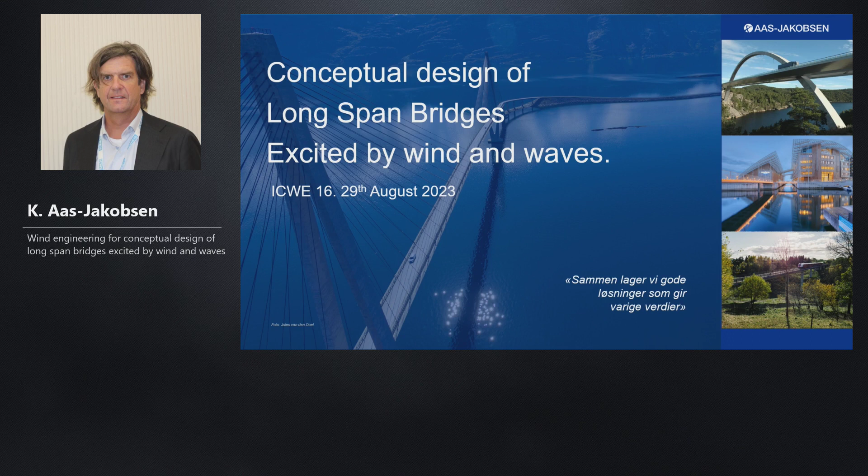Many years ago, I was on a vacation with my family. We arrived at the site very late at night and went to bed. Early in the morning, while still dark outside, the room started to shake. And it escalated fast.

Earthquake. Coming from Norway, we are not used to that, and that was the first time for me. We grabbed our kids and decided to stand at a stiff point in the structure, thinking that would create an air pocket in case of collapse. So we stood there shaking, listening to what sounded like a freight train running through the floor below us, accompanied by concrete elements rattling on its support.

Counting seconds, which is a proxy for energy release. The whole hotel evacuated quietly into the dark onto a small hill next to the ocean. This was a few years after the Indian Ocean earthquake with a devastating tsunami, and you could see that everybody was looking at the ocean and thinking the same thing.

After a long time, we were allowed to go back into our building. At that point, I was very grateful that this country has a comprehensive design code with respect to earthquakes, because an earthquake of this magnitude, as seen in other places in the world, will completely level the buildings to the ground. Back in the room, I was a bit curious.

So the point of this talk is safety of structure, and that you and I have a responsibility of making safe design, even if it's not codified. That is the core of my talk today.

I'm going to talk about ordinary long-span bridges, what happens when we make them longer and put them into the water. I'm going to show that we need extensive measurements of metocean data, how we can transform that into load on the structure, and how we can extract the important design parameters from a huge amount of data.

And in the end, I'm going to talk about some promising technology for wind engineering.

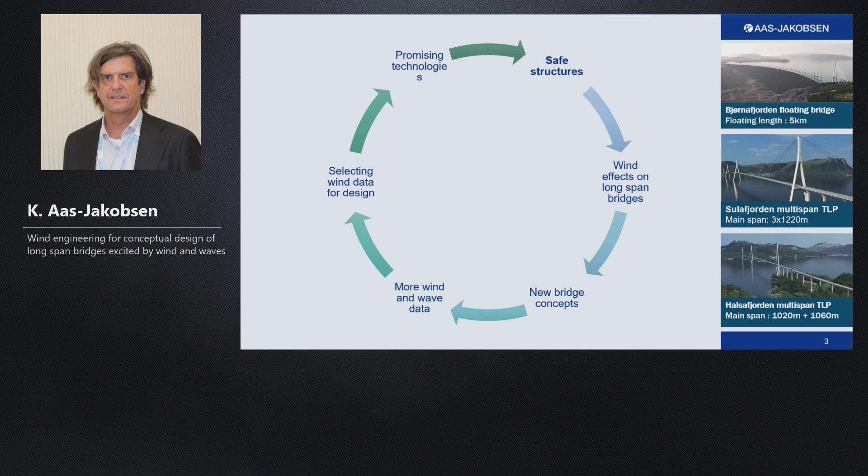Let's look first at some of the basic design concepts. This is a very simplified picture, but what we usually do is get a load requirement from our client, for instance specifying a return period of 100 years. We take these loads and calculate the forces in our structure, and of course we want the forces to be smaller than our design capacity.

To take into account uncertainties in material and workmanship, we reduce the capacity with a material factor. And to take into account uncertainty in our load, we increase our load with a load factor. The total safety for this type of structure is typically around 2, which I think is a comfortable level.

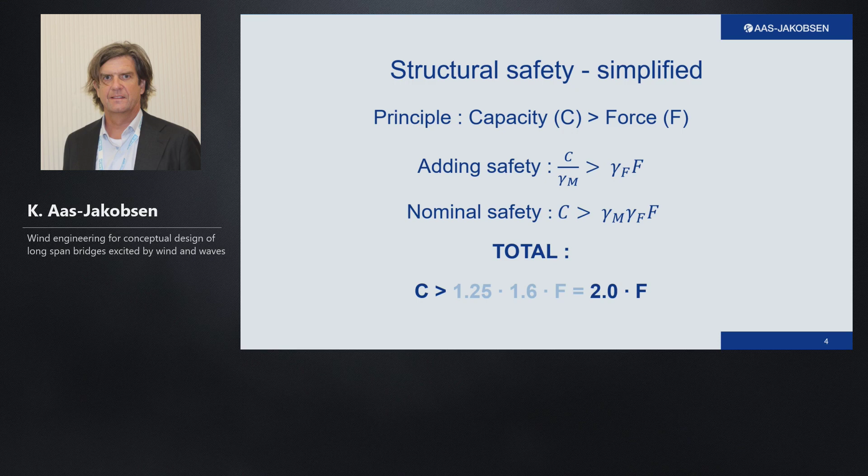So when we start out the design, we get the design requirement from our client, and these are typically functional requirements. It will tell us the number of lanes, the size of the navigational channel, and it also tells us a little bit about the loads.

It will also tell us a flutter criteria, which is a criteria that makes sure that the bridge has sufficient safety with respect to high winds.

Now, for long-span bridges which span more than 1,700 meters, we normally need to do double decks. This, of course, has a big cost impact on the structure. It will change the size of the main cable, make the tower wider, and we need a bit bigger anchorages.

They also specify comfort criteria, typically in the form of acceleration. And then vortex shedding becomes important, and we might need to change the cross-section a little bit to make it work well with respect to vortex shedding.

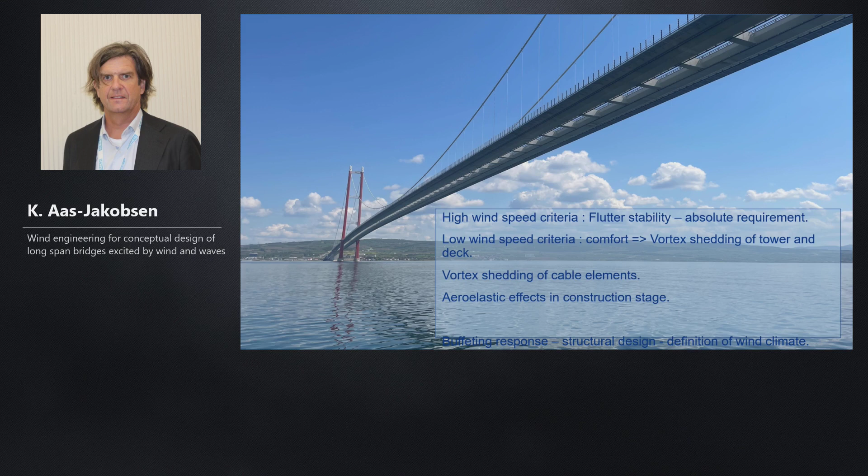Also, we have vibration of individual components, and this needs to be mitigated or it can become a maintenance issue. So in the following part of this talk, I would limit myself to wind loads of the buffeting type, as that is the load that got into our design in the ULS forces.

Now, if we extend the span of long span bridges, the price of the structure increases exponentially. So it becomes interesting to put the towers into water. When we put them into water, they are affected both by static and dynamic loads of the water. And as we get deeper, the foundation becomes more and more complex and expensive. At some point, it will be of interest to see if we can use water as support.

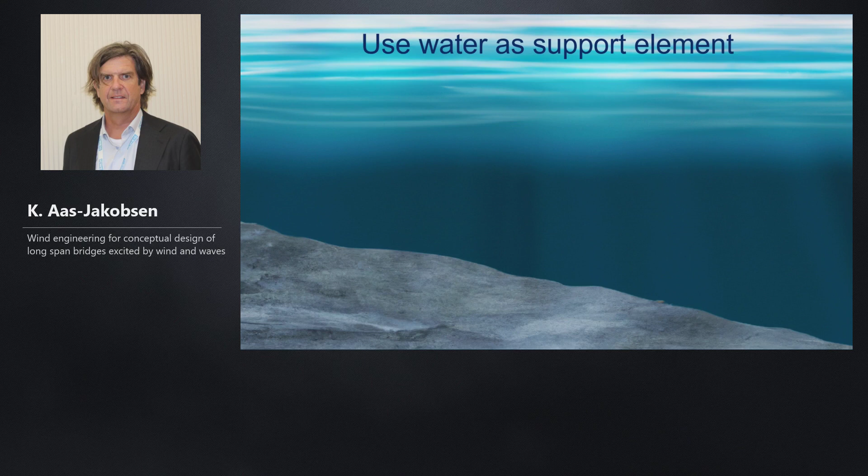But then we also have dynamic structures in water, and we have to take into account the dynamics of the waves. The dynamics of the wave have a different frequency content than wind and earthquake. It also means that we have to take into account hydrodynamic effects of the floater, giving added mass and added damping to our dynamics.

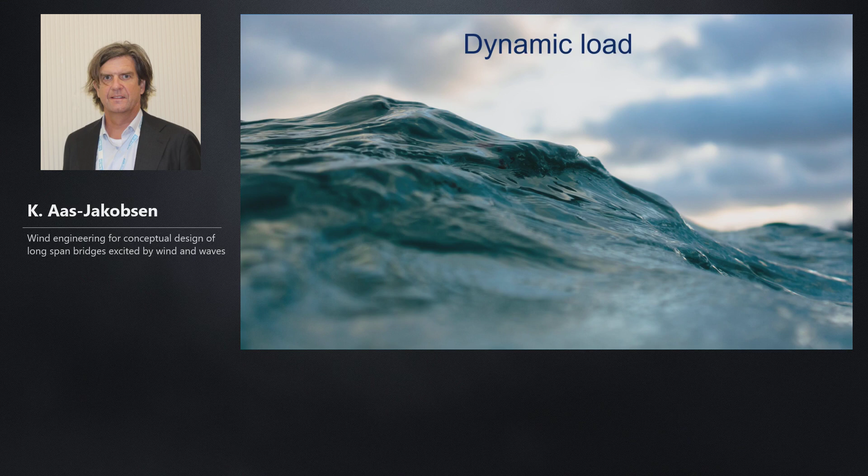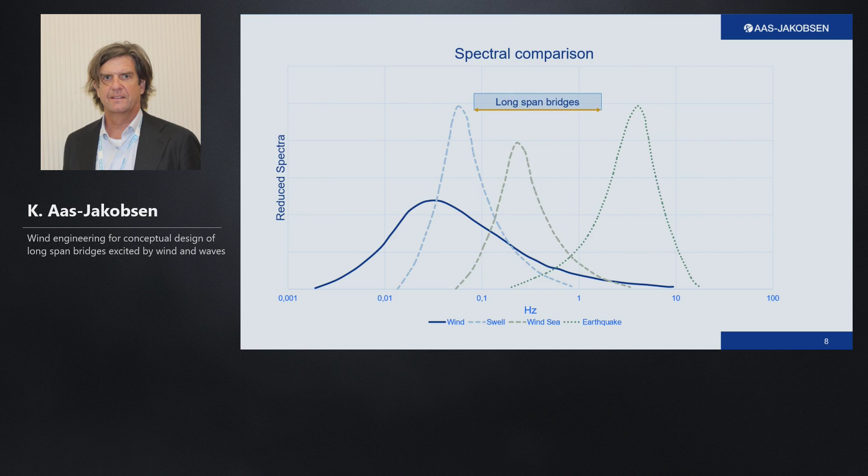Here is a comparison of the frequency content of the different loads. The blue line is the wind, and the green line is the earthquake. You can notice I have split the waves into two groups: one is swell, associated with storms far away from the site, and the other is wind-driven, associated with weather systems passing the site. If you relate this to our typical long-span bridges, we have frequency in this range. And of course, if you have the towers on land, you don't have to take into account wave loading.

For buildings, you will see that they are more sensitive to earthquakes. But if we then move into the water, looking at jackets, GBSs, or caissons, we get frequency that starts to pick up wave dynamics.

If you move further out into the sea, we find TLP structures, tension leg platforms, which are typically gas and production facilities connected to the bottom with steel tubes. These are more flexible, and the typical design of these is to try to separate the lowest frequency away from the swell.

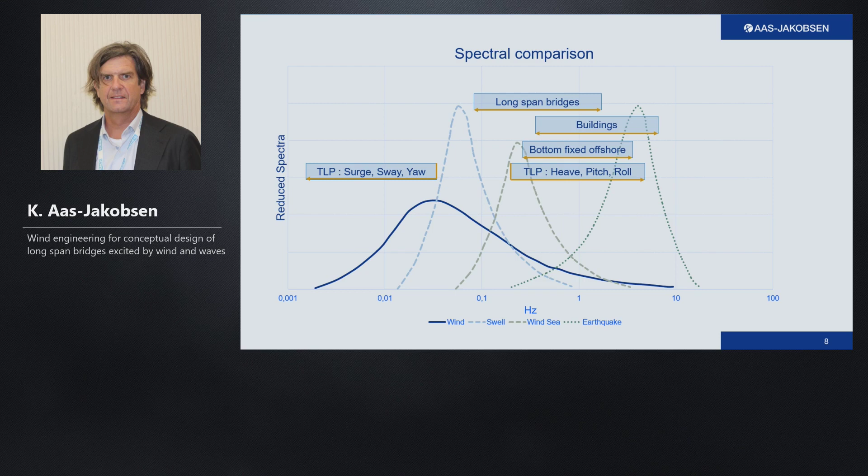Now, if you go back to the long span bridges and start to make them longer, you get more of the low frequency part, lower frequencies. And since we have a superstructure on top of this, for instance a TLP, you have a lot of modes related to the superstructure, and it makes it impossible to design yourself out of the swell. So this needs to be taken into account in our design.

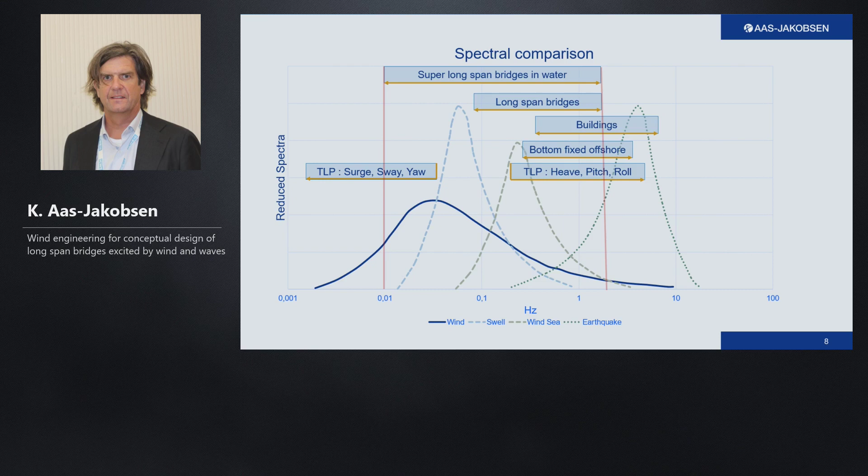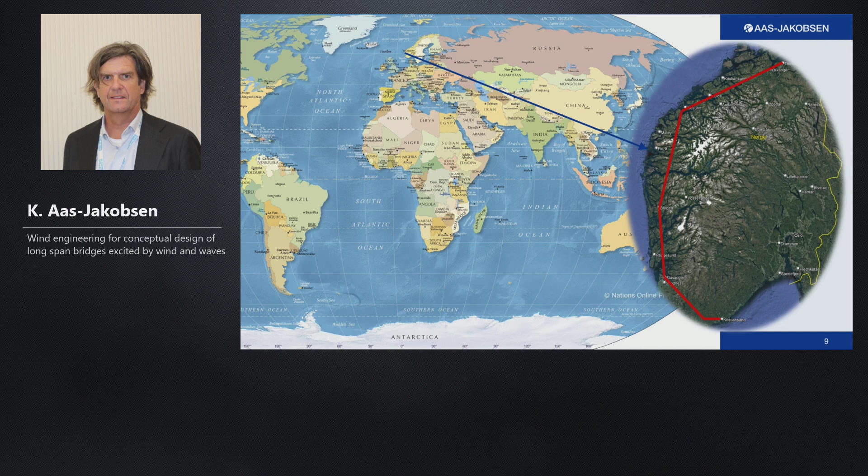I'm going to show two examples. They're all related to the E39, a planned highway along the western coast of Norway with the purpose of reducing travel time. The road crosses many of the widest and deepest fjords in Norway, and these concepts I'm going to show today can be used for several of these crossings.

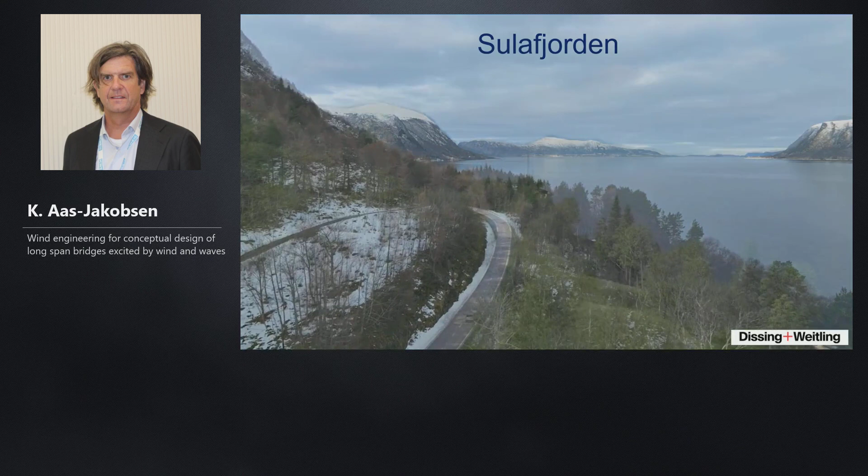So this is the Sulafjorden. It's a typical Norwegian fjord, quite wide, with a complex surrounding terrain and steep faces that continue down through the water. The water basin is quite exposed. Down to the left of this picture, you find the North Atlantic Ocean, and the fjord is only sheltered by some scattered islands.

Our client, in an early phase, identified four different possible alignments, ranging from 2,700 meters at the fjord entrance to 4 kilometers further into the fjord. The depth of this fjord is around 450 meters, and quite flat in the middle.

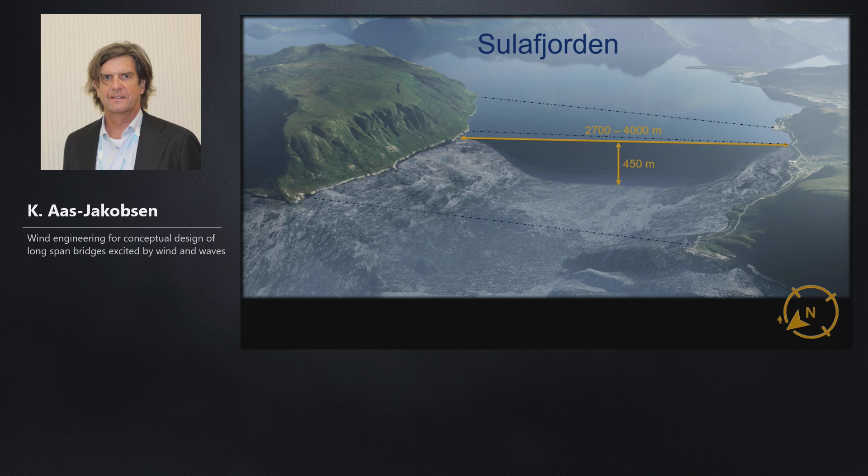So they wanted us to explore four different concepts. At the front is a one-span suspension bridge with a main span of around 2,700 meters, a little bit shorter than the planned Messina bridge. Then you have two concepts with fixed bottom foundations, and then there's a TLP structure, which is what I'm going to talk about today.

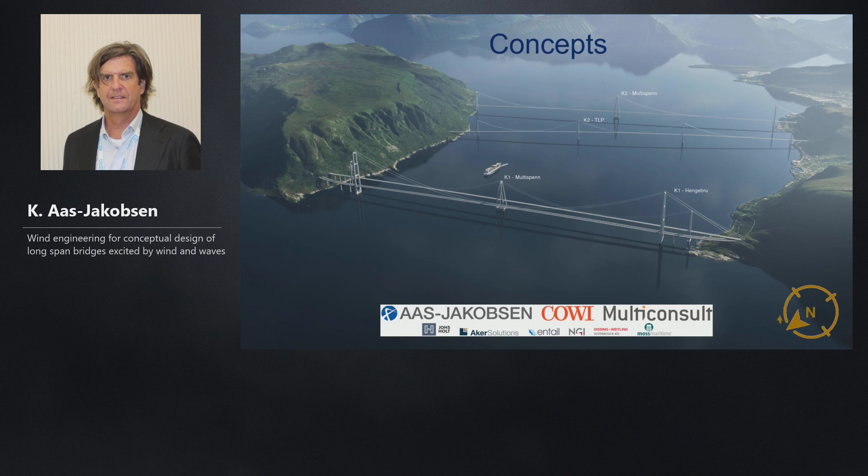This multi-span TLP structure is supported by floating foundations. These foundations are supported by tension leg and suction anchor, and combined suction anchor and mass anchor at the bottom. This video shows a typical installation sequence for that system. Tension is added to the system by deballasting the floater, as shown here.

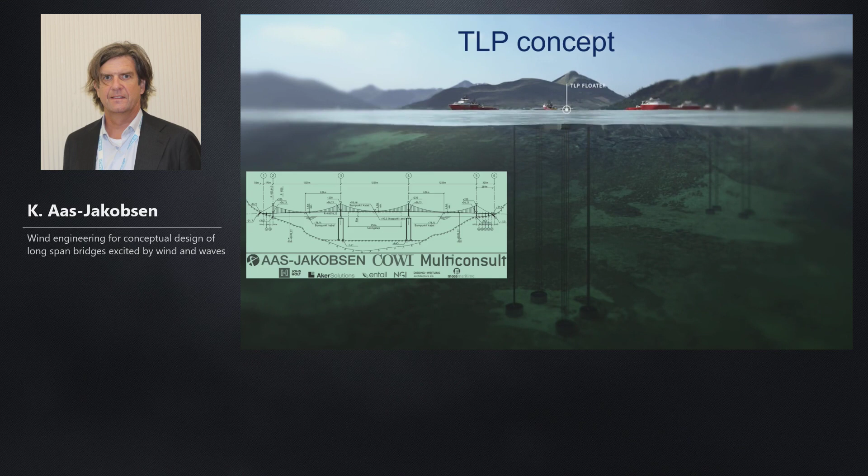Now, having a multi-span bridge, we use steel towers at the floating foundation. The steel towers were chosen because of low weight, so we want to minimize the weight.

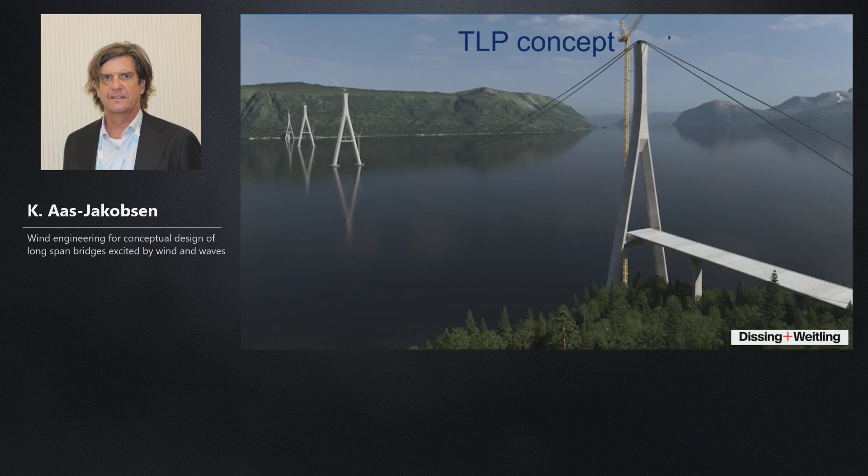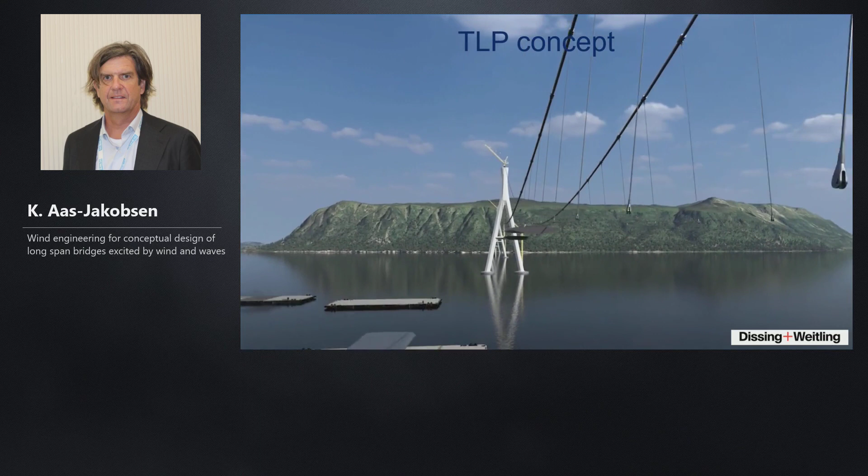But the main problem with a multi-span suspension bridge is that you can have different loads on different parts of the span, and that creates unbalanced forces over the tower. These have to be balanced out, and during that balancing, you have to adjust the tower stiffness.

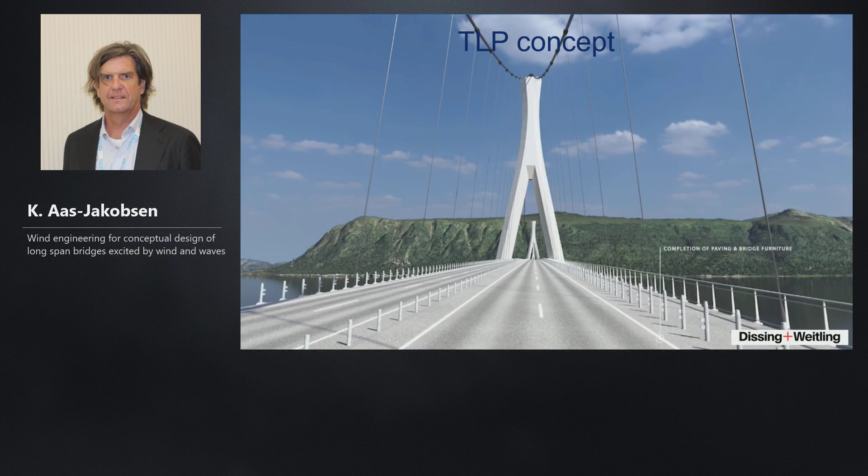I think overall we have found a good balance between structural design and aesthetics. Seen from the sea, when they're coming in, you can see that the towers are around 200 to 230 meters, and it's a quite transparent scene from this angle. It also accommodates the largest cruise ships in the world.

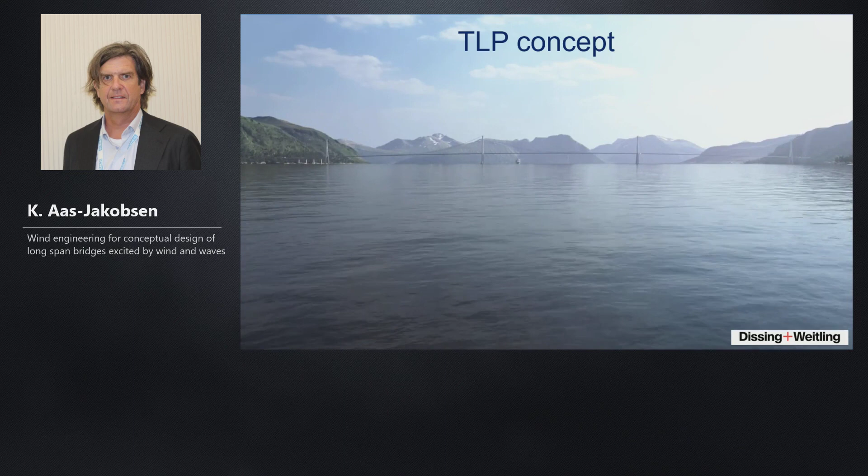So here are the 4 alignments. At the beginning of the project, more than 8 years ago, the client asked us to understand the metocean climate in this fjord. How do you go about doing that? We specified a measurement program consisting of 4 meteorological wind measuring masts placed at strategic locations compared to where we can expect towers. We also added wave buoys, both permanent and temporary. Some of these buoys measure current, salinity, and temperature all the way down to the 450-meter deep bottom. I would say the measurement campaign has been very successful.

We have been logging 24/7 with up to 10 hertz, and we have data for 8 years. Looking at the quality of the data, we find that 99.9% of the 10-minute mean values that are quality controlled and stored in the database are found useful. The same number for the wave measurements is 97%. This shows that you can have ambitions with respect to measuring both wind and waves.

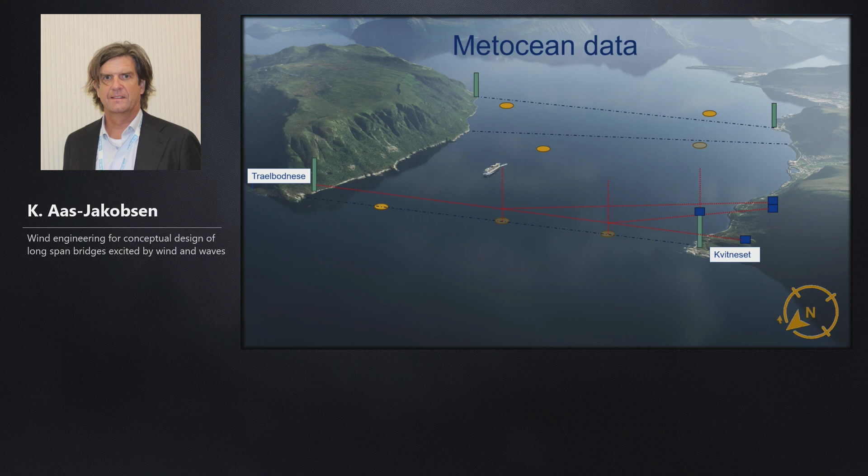We also challenged the contractor to use LiDARs, with a basic outline like this. The purpose of this was twofold. First, we wanted to understand how the mean wind profile was along the tower. So we placed the LiDAR on top of the wind measurement mast, and we were able to measure an additional 200 meters up above the wind mast.

What we found is that, for instance, the mean wind is not from the same direction. It twists as you go up, heavily influenced by the topographic feature to the southwest. This, of course, is something we have to take into account in detailed design.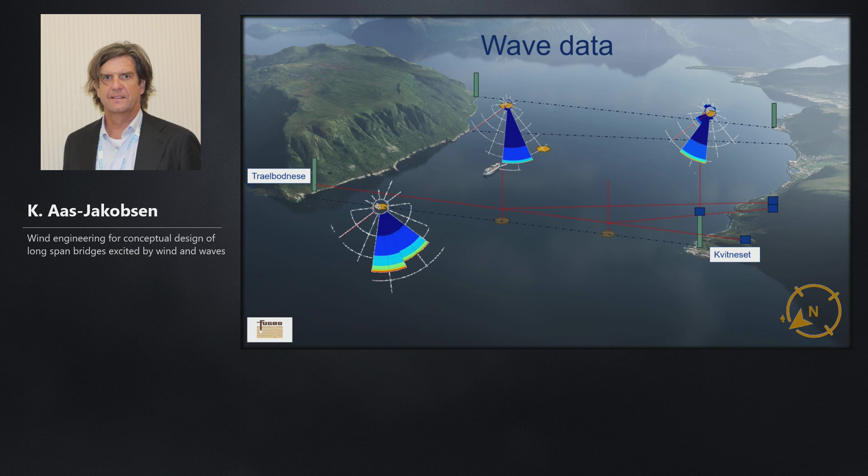Now we need to take all this data and form usable loads that we can use. We call these environmental states, and we look at the long-term distribution of the wind, wave, and swell. To reduce the number of combinations, we block the waves into units while preserving the marginal probability. Then we merge into environmental states, typically between 100 and 500, depending on the complexity of our measurements.

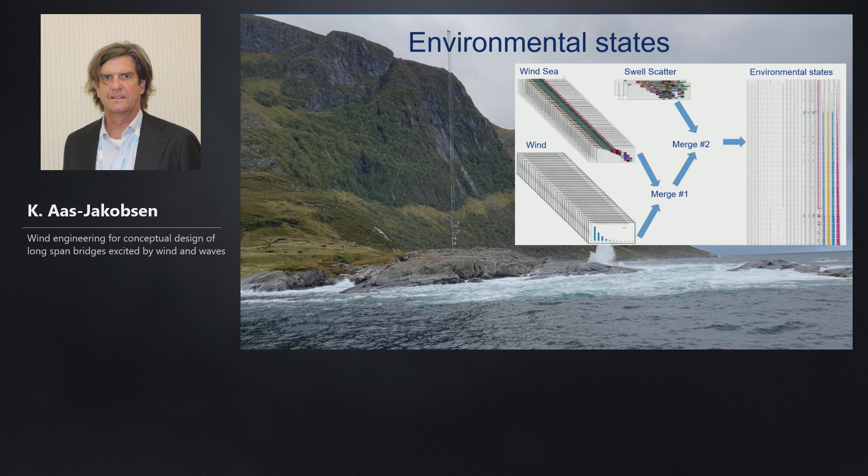We're now ready to start the design of the structure. As I told you, there is a differential force on top of the tower. Of course, we want a small floater—it attracts little load, and we can have a nice, elegant diamond tower.

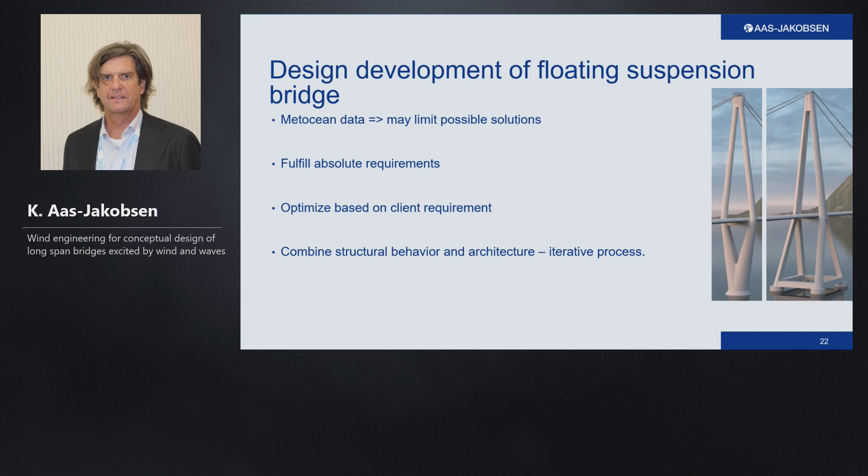But to compensate or handle the unbalanced load at the top of the tower, we might need to make structural changes to the tower. To some extent, this can lead us to need a different floater than expected, and this will attract more load, causing more differential force and a difficult design situation. You have to manage hydrodynamic loads, manage the analysis, and try to find a nice architectural feature.

The next figure shows some of the options we worked on in this process. We worked on the tower, different ship impact barriers, and the alignment. For these TLP structures, we previously introduced a top cable, which is a complicated element to actually build. So in this project, we worked a lot to see if we could remove the top cable, and we think we found a way—the current proposal does not contain this top cable.

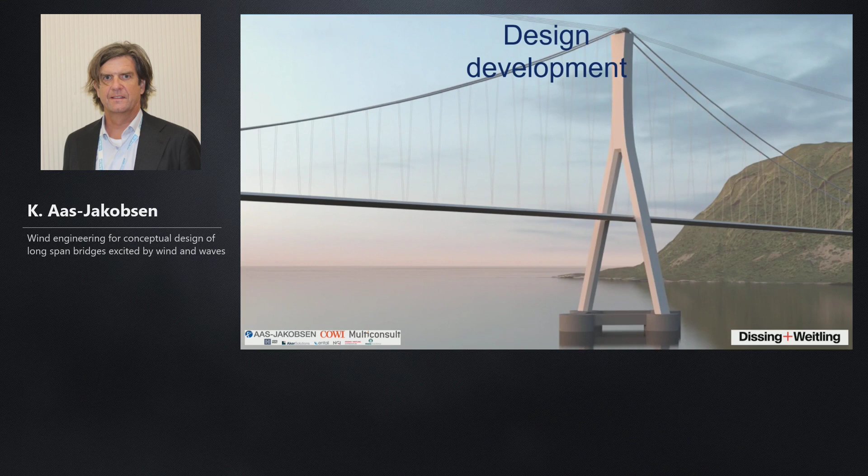Now, at the end, we ended up with something we were quite happy with. This will emerge in a few seconds. Yeah, here you have it.

We take an updated finite element method model, and include wind, wave, and current. When we design this, we also account for hydrodynamic properties—hydrodynamic mass and hydrodynamic damping—which modify our frequency and mode shapes.

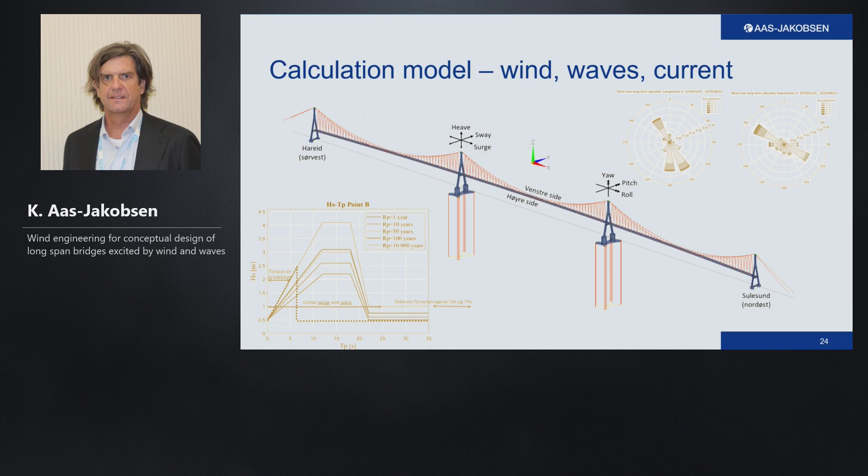Let's first look at some results from this analysis. The first is the tethers, the steel tubes that go down into the sea. Here's the horizontal axis showing period, and typically you'll find wind sea forces around a period of 5 seconds. In this case, we don't have much from wind sea for this component; instead we find swell at higher periods. What we see here is results between 10 and 20 seconds, which is consistent with swell period.

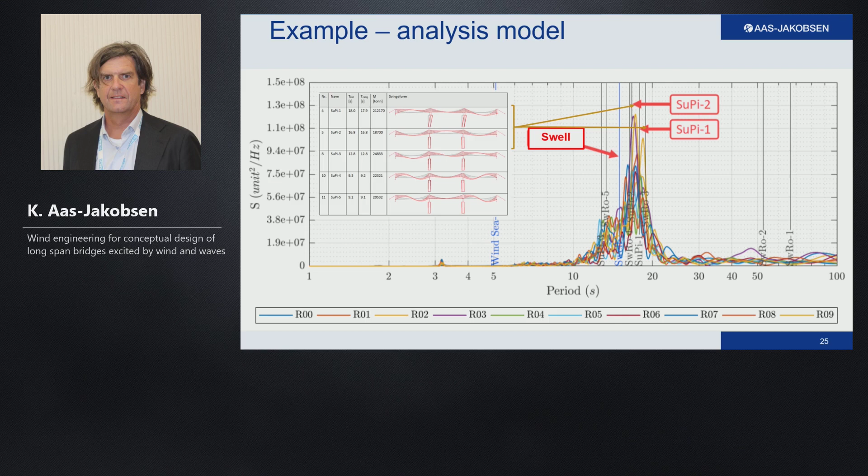When we study it further, we see that it's the surge pitch mode that initiates these dynamic forces, coming from movement of the superstructure. But the dominating force varies throughout the structure—for the tethers, this is surge pitch, but for other parts it could be other sources.

Here we show the strong axis moment along the whole bridge alignment. You may notice that the ultimate limit state forces stemming from wind, traffic, and self-weight are about the same level as ship impact. This is what we see in most of these projects—these forces tend to be around the same level. Introducing the load factors, ULS becomes the driving force for our design.

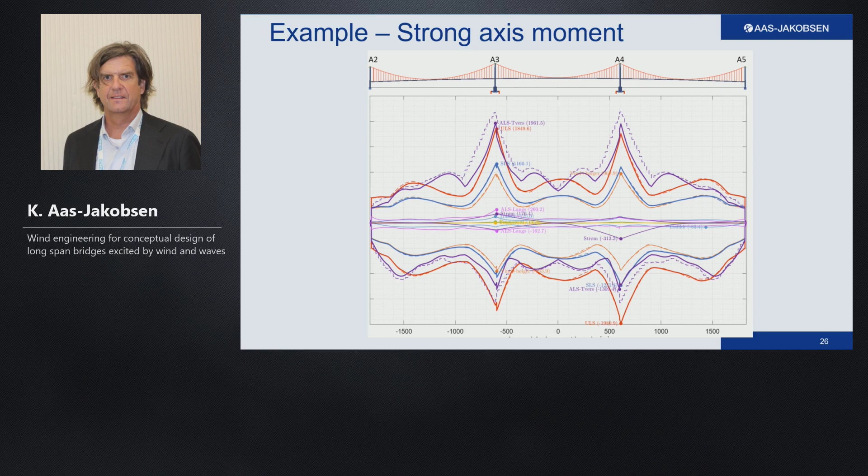Up until now, I haven't talked much about how we include hydrodynamic mass and hydrodynamic damping. I'm going to show another example: a floating 5-kilometer-long floating bridge. It has a cable-stayed bridge at one end to support a navigational channel. The same extensive measurements were done, and the surrounding terrain is a little less complex and more sheltered from the Atlantic Ocean.

Now, if you have this bridge and apply wind to it, it will start to move through the water, and you'll get added mass and hydrodynamic damping. This needs to be accounted for in our analysis model, as the added mass modifies the frequency and mode shapes, and the damping cuts out the peak of our response. Similarly, if the current or wind pushes the girder through the air, you'll get some additional damping from aerodynamic damping.

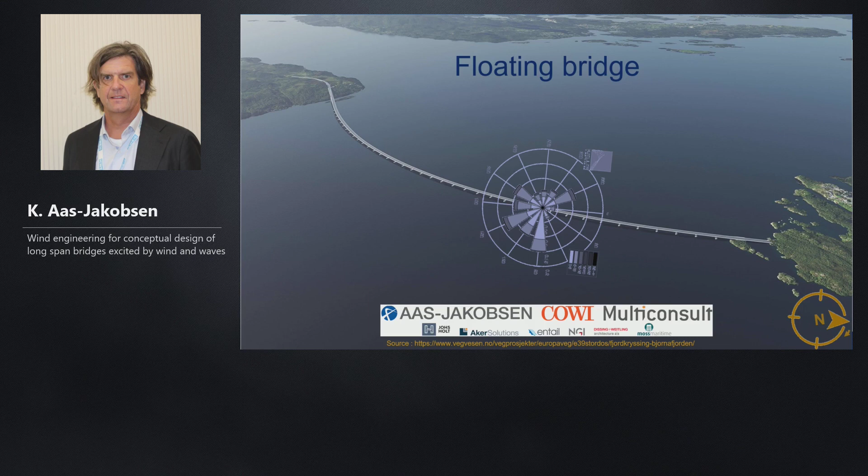Typically, the structural damping we use for this structure is 0.5% of critical. But when we have updated our frequency with respect to the additional mass, we can go in and calculate the contribution to damping on the different modes.

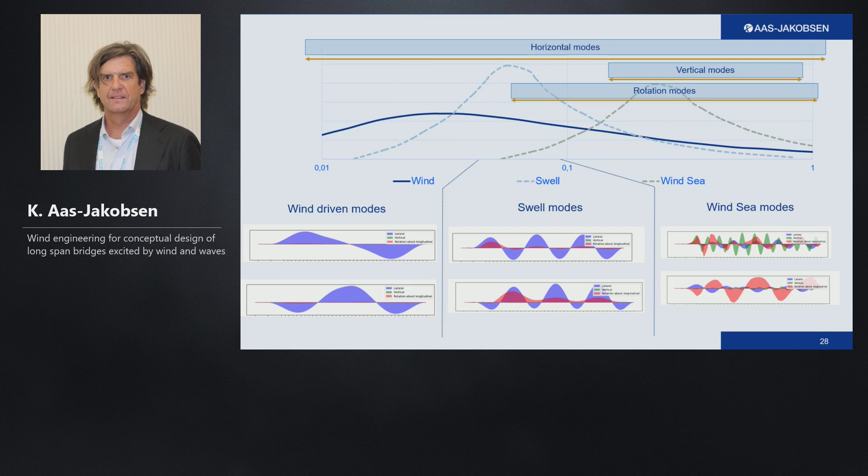But first, you will see that different modes are driven by different loads. The blue color indicates horizontal movement, the red is rotational, and the green one is vertical. So the slowest modes are mainly driven by wind, while the highest modes are mainly driven by waves. And then you have also some modes in the swell region between 10 and 20 seconds.

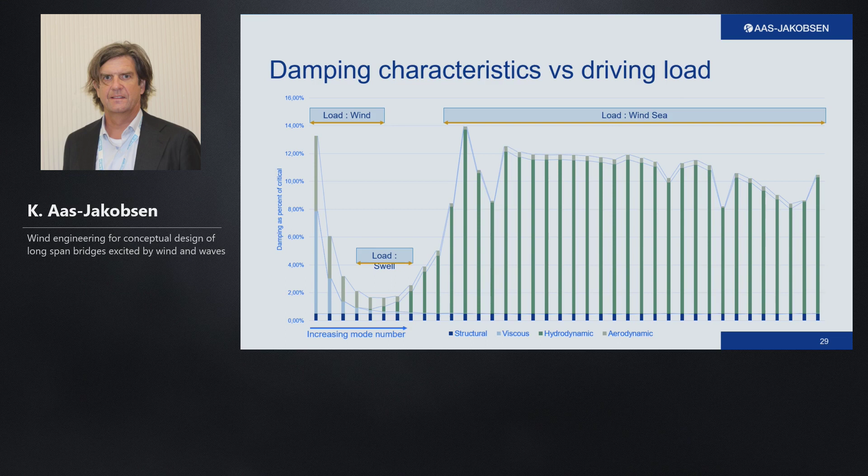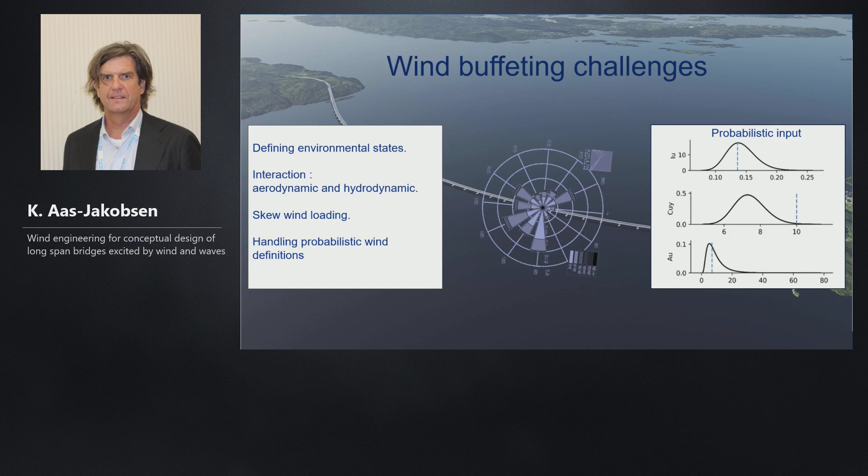And I marked in blue lines our go-to values from the N400. You see sometimes it's quite good, but other times it's far off. And we can look a little bit more into detail here.

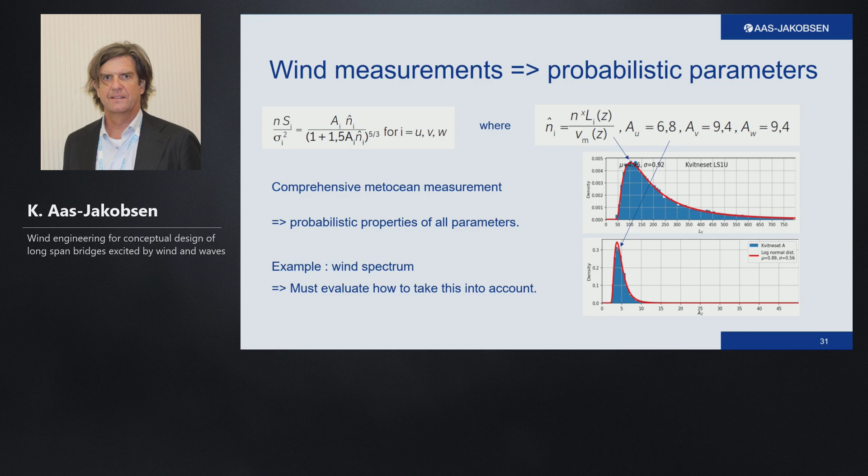So, thinking about it and maturing, we think it's a good way of doing it: giving the designer the distributions and asking him to pick the right values that fit the actual structure that it's going to be used on.

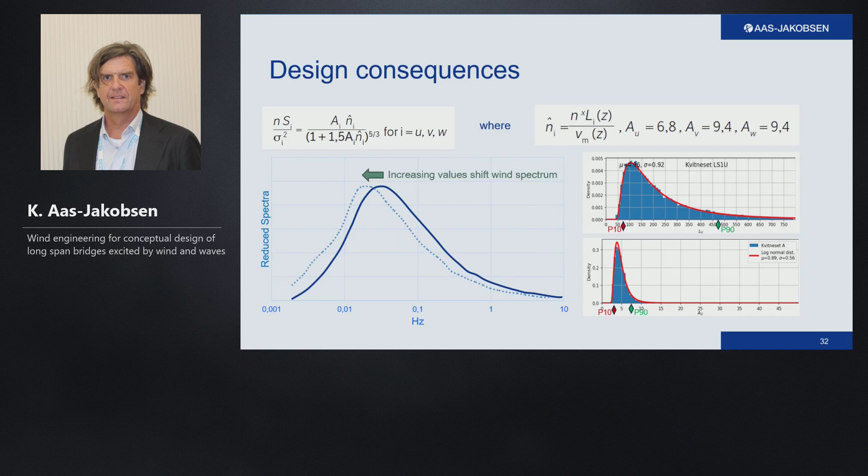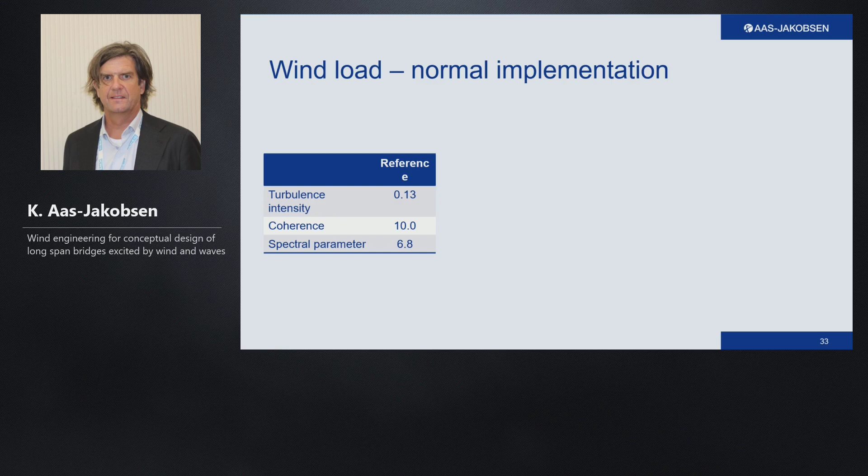Now, we have... Oh, sorry. So, just to recap, these are the values that we expected, deterministic values, and this is what we got. It is formulated as P10, P50, and P90 values, and given as a distribution.

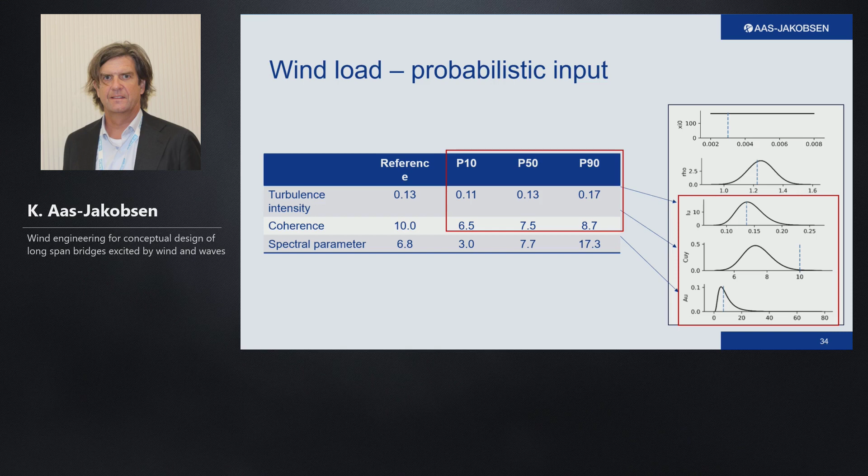And in addition, for reference, I've added a span for the damping, and also the air density, calculated based on temperature at the site.

So, we had different strategies for how we should implement it. Of course, we could just pick the worst of all. And we could use mean or average or some other representative value, or we can try to include all the different combinations in our time domain analysis.

The two first are very quick, but we will not know the uncertainty that we introduce into our solution. The last is really analysis intensive.

Now, when we're doing this analysis, we need to do 10 realizations, typically 10 realizations of each analysis to remove the seed dependency. Having 500 environmental states and a million possible combinations of these parameters will make it very time consuming to include directly in design.

So instead we have discovered in earlier phases that we can use ordinary buffeting analysis and get an overview of the wind response, provided that we include hydrodynamic mass, its effect on frequency, and hydrodynamic damping. In addition, we assume that we could use a narrowband approximation, and I will show you a comparison of that later today.

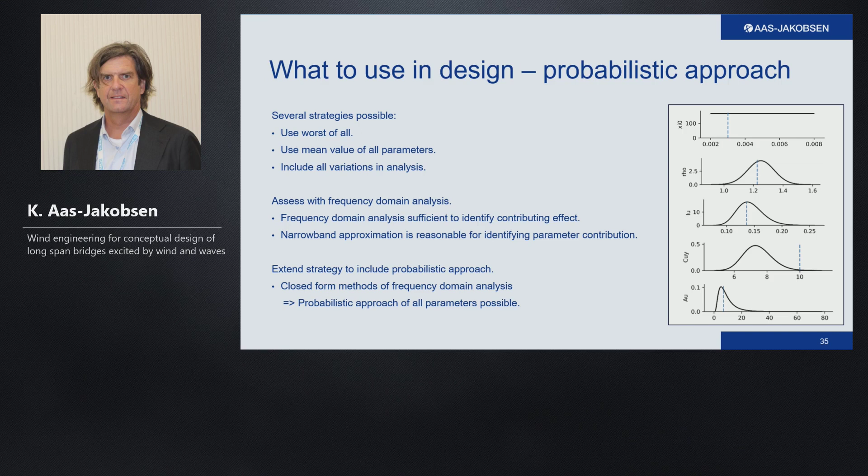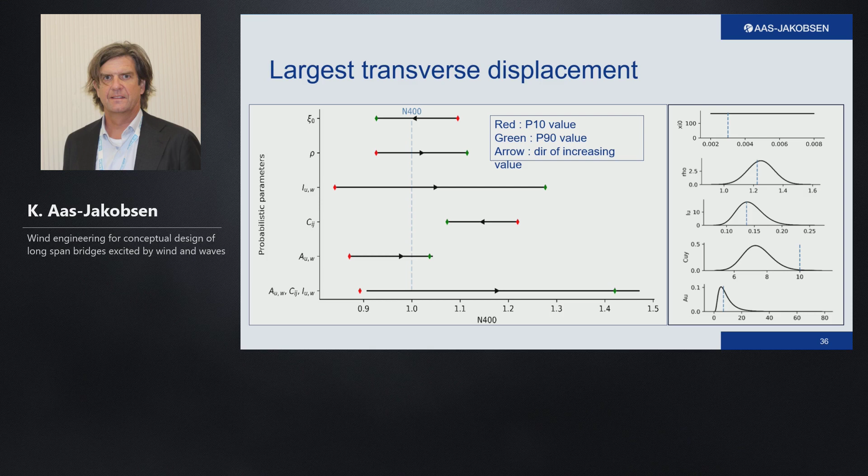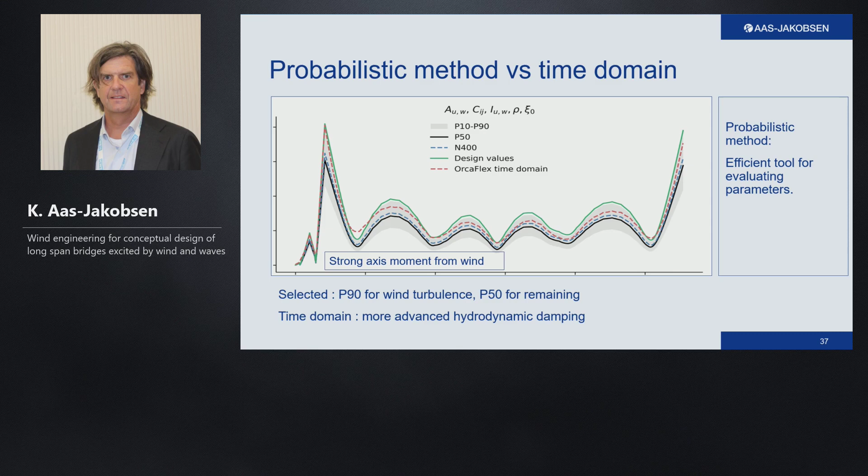So this shows the results along the whole alignment for the strong axis moment. It compares the different things I've talked about, and the green line is based on the frequency domain analysis of our system with the selected design values, while the red shows results from the time domain analysis, where we take into account full broadband response and also all the damping and non-linearities. So it's a quite good fit, and it's good enough for the purpose of selecting design parameters.

So, what's next? What we looked at is only an increment compared to what we have worked on before.

And I think the answer is machine learning, artificial intelligence. This has advanced other parts of our society a lot, and we actually use it every day. You have Face ID, you have Google searches, and for instance, for medical image and medical biopsies, you now use this to identify cancer, a task that was highly specialized and done by experts before, and these systems do this better than experts. So I think this is a huge potential for wind engineering.

The downside is that you need a lot of data, you need a lot of testing, and you don't know how the system performs when you go out of the boundary of this. So for a scientist or engineer, this is not satisfactory to not know the why. And here is a way to do that, and that is to include the physics through physics-informed neural networks.

Now, to conclude, we have seen that we have moved our bridges, or can move our bridges from land out to the sea, and when we put our bridges into the water, we need to have extensive measurements. And I showed you that we can use a probabilistic approach to extract the important values from these measurements. And I think that physics-informed machine learning has attractive properties for wind engineering.